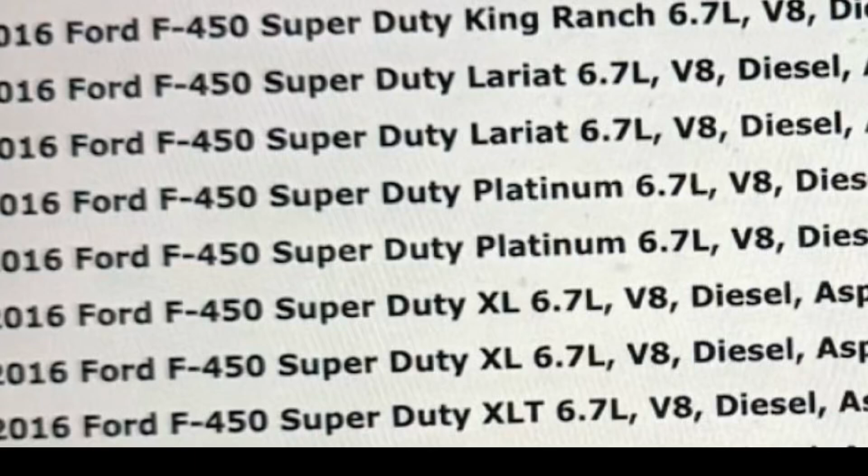What's up, YouTube? Today we're going over the fuel filter replacement on a 6.7 liter Powerstroke.

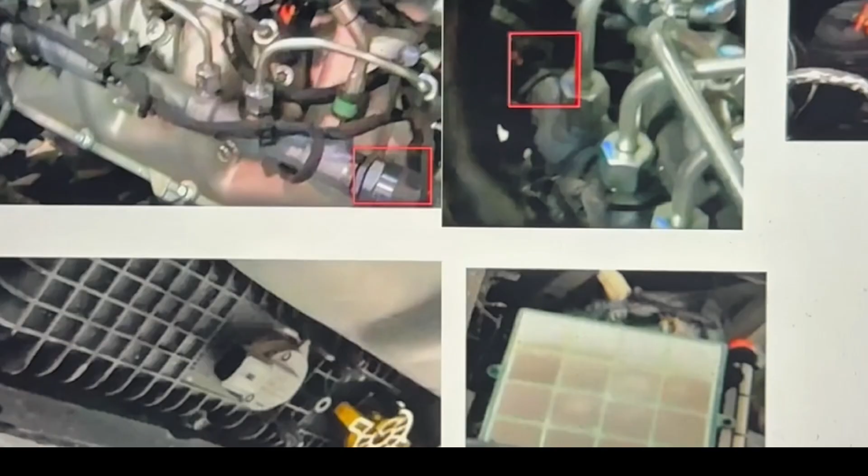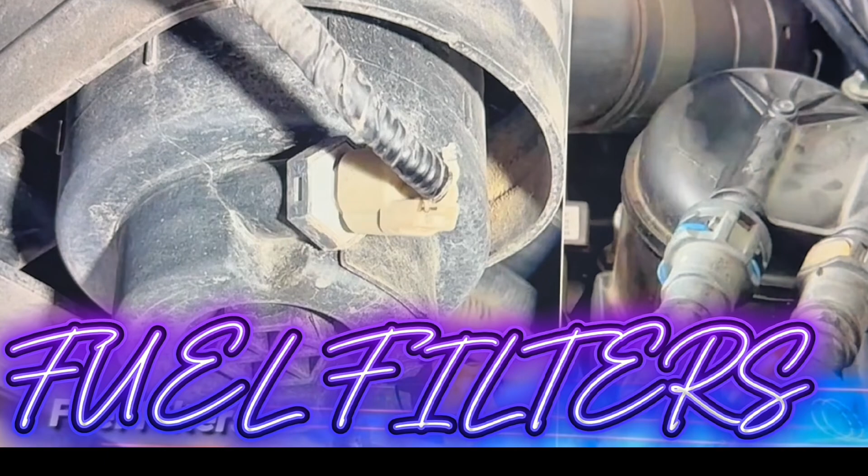Most of all, the critical importance of the fuel filter contamination test. This is highly likely one of the most frequently skipped tests on these vehicles. This is on a Ford F450 with a 6.7 liter Powerstroke engine. We're going to go over how and where to check for contamination and also check over the less accessible components. Okay, so here we go.

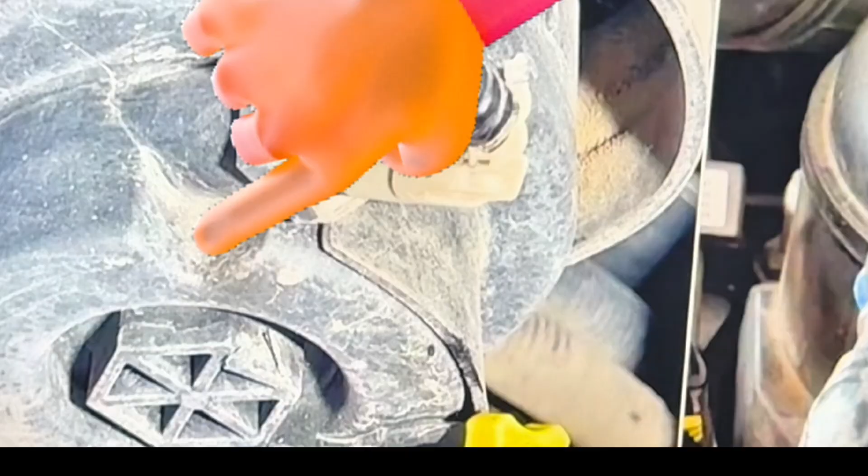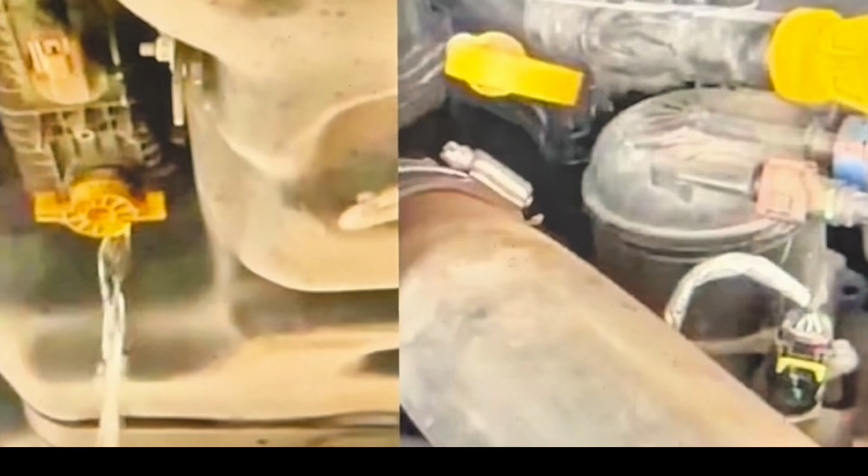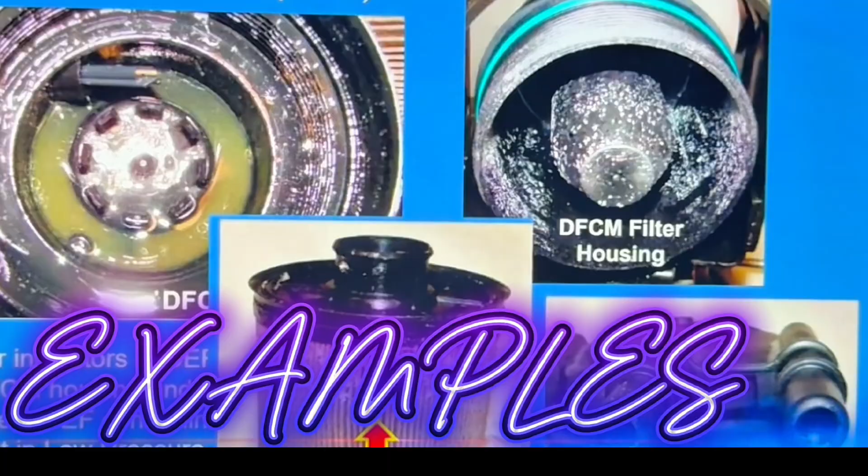If the fuel was not contaminated, proceed to removing the primary filter housing and filter and inspecting further. You will also want to remove the secondary filter and drain into a suitable container for inspection. The later model 6.7 liter diesel has the same filter inspection procedure, however the primary filter is located at the tank and the secondary filter has an extra port at the front of the vehicle.

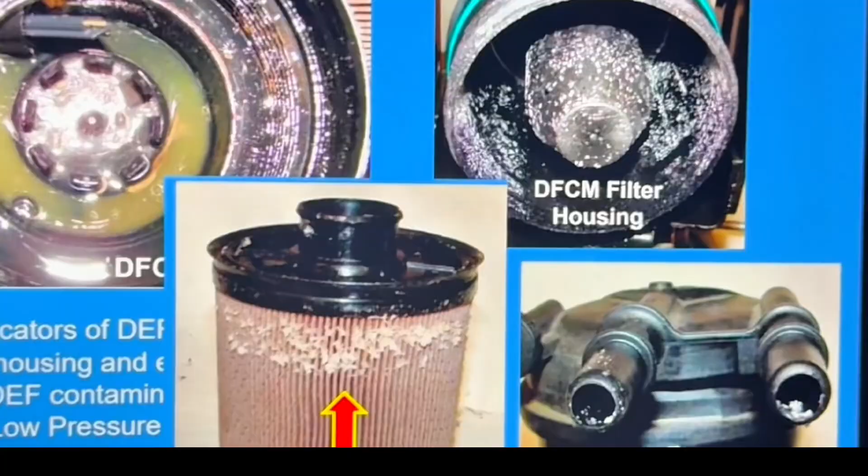There are two common types of contamination you will be looking for. The first example is showing fuel contaminated with diesel exhaust fluid. This happens when customers mistakenly put the fluid in the wrong tank. This is especially problematic because not only does it damage the fuel system, but engine and exhaust system damage can occur as well.

The second example is metal contamination. This generally comes from the injection pump. The contamination can be major amounts of metal or just small particles like what you see here. Regardless of the amount or size, this contamination would indicate the need to replace the entire fuel system.

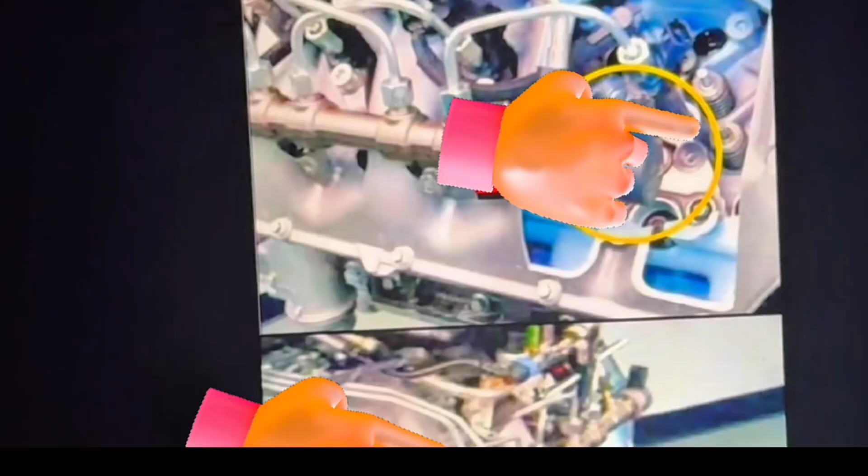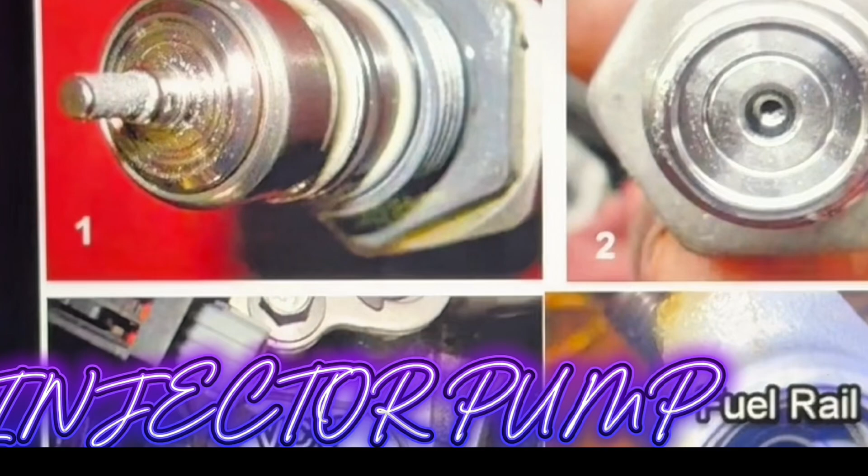Next place we're going to check will be the driver's injector rail. Remove the fuel pressure sensor and the fuel pressure regulator. Inspect them for signs of contamination. It's also a good idea to put a magnet inside the rail to look for small particles of metal. Looking in the rail, there's not a lot of metal, but this is enough to damage new injectors and pumps. Here are some examples to look for on the sensor, the regulator, and the rail.

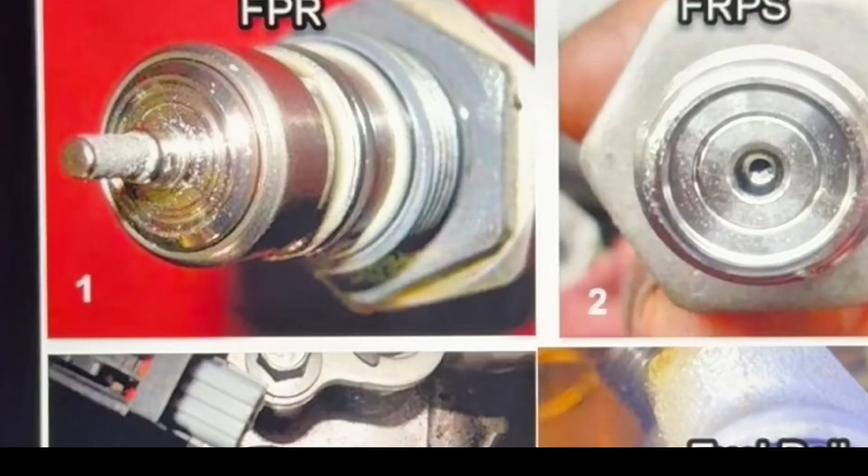This example is the final place to inspect before replacing the injection pump. This is showing the injection pump with the volume control regulator removed. What should be seen down in the hole is clean diesel fuel. Metal fragments will once again indicate the need to replace the fuel system.

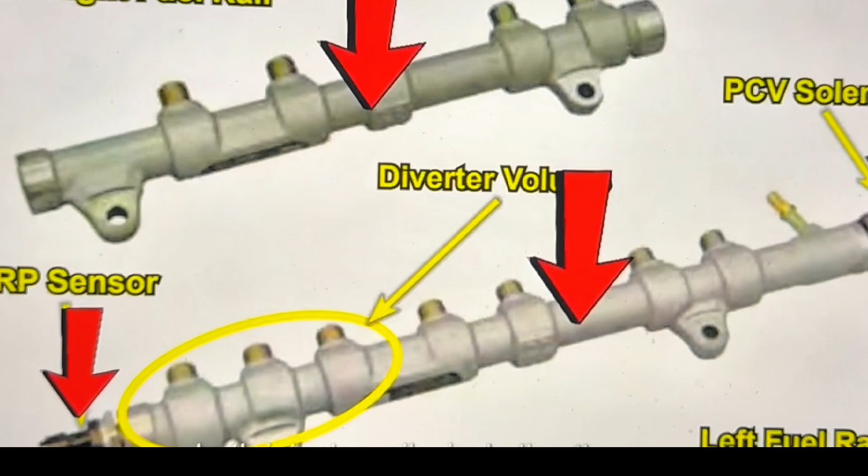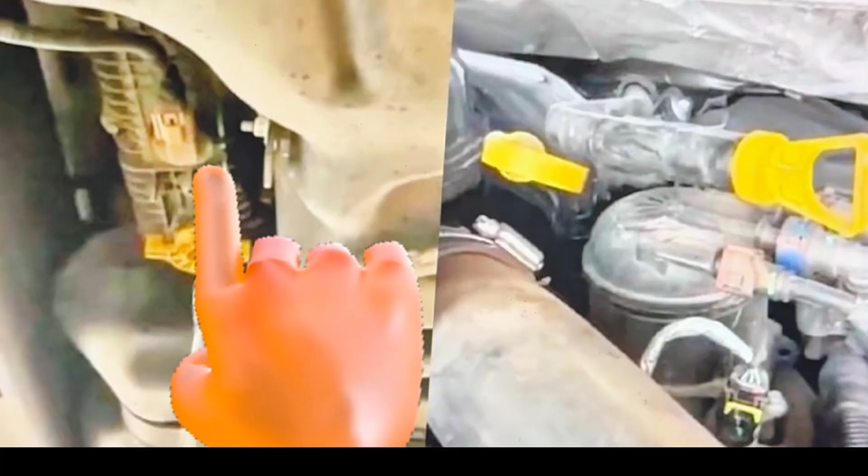If contamination has been found, the following items are critical to replace: both injector rails, including the pressure regulator, fuel pressure sensor, and the steel fuel lines at the rail, the injector pump, and all 8 injectors, both fuel filters and the primary fuel filter. Also, the remaining fuel lines must be completely flushed out thoroughly. It is recommended to replace the fuel tank as well.

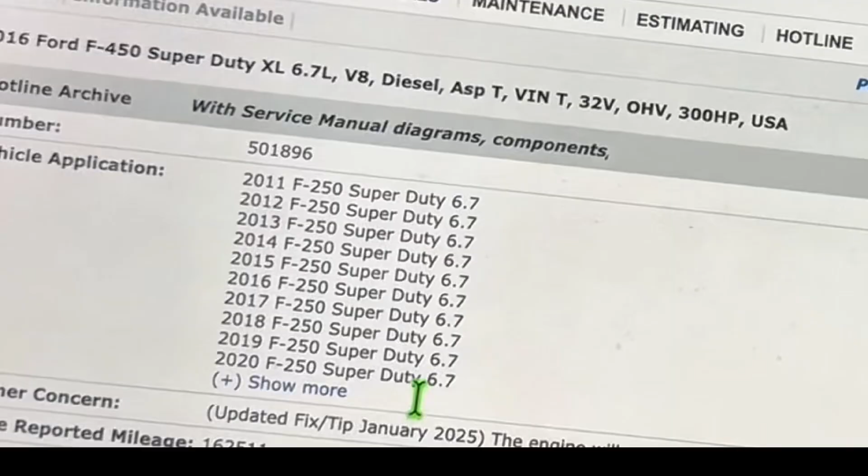Please take note that there are cases out there where techs have performed entire fuel system overhauls and did not replace the fuel tank. Particles from the fuel tank did work their way back in and damage the fuel system. So I just want to reemphasize, changing your fuel filters is very important to properly maintaining the 6.7 liter F450. Very critical. If you don't do it, it could be disastrous down the road, guys. Just stay on top of that.

So right now I'm going to jump right into this video I did with the customer. He called me—he basically had replaced both of his fuel filters and waited too long. So unfortunately for him, he had contaminated his entire system. The truck drove about 50 miles after replacement. He called me thinking he just had air in the lines. Clearly he doesn't have air in the lines.

I'm just going over some of my notes here, running through the laptop. I'm using a software called Direct Hit. I'm basically going to show you guys pretty much everything on here—how many issues are really out there existing with this problem. A significant amount of issues. Fuel filters not getting replaced on time, just over and over and over. You see people not taking care of these systems. Hopefully by the end of this, you guys will have a better understanding of how this works, what to do, what not to do, and what to be on the lookout for.

Most of all, just change your fuel filters.

Next, why replacing the fuel filters is so critical. Diesel fuel filters have the crucial job of removing dirt, rust, and water from the fuel before it reaches the high-pressure fuel pump and injectors. Over time, the filter clogs with contamination. If you don't replace them on schedule, several problems can occur. Engine performance issues: a clogged filter strangles fuel flow, leading to loss of power, poor acceleration, and hard starting. The engine may run rough or even stall because it's not getting enough clean fuel.

Fuel injection system damage: neglecting filter changes can allow debris or water to reach the high pressure fuel pump and injectors, which operate at extreme pressure, 30,000 plus psi. The 6.7 liter Powerstroke injectors and the CP4 fuel pump are very sensitive to fuel quality. If contaminants or water get through, they can score or wear out these precision components or even cause the pump to fail catastrophically. Ford's own service manual warns that failing to replace fuel filters on schedule can lead to fuel injection system damage.

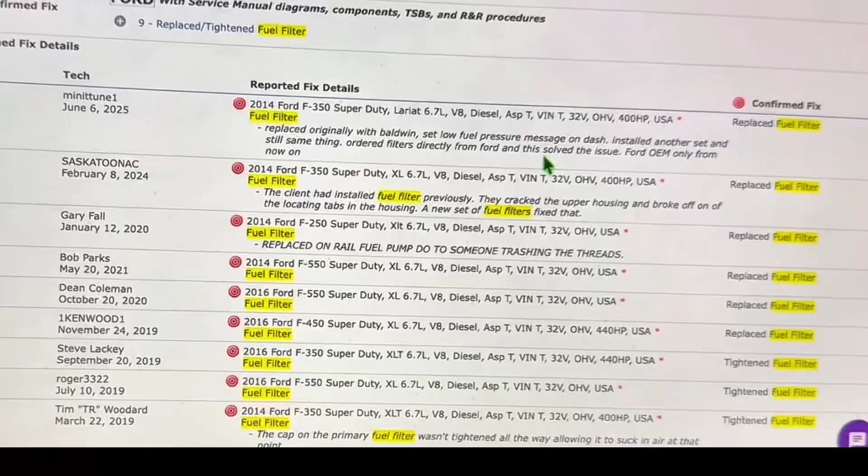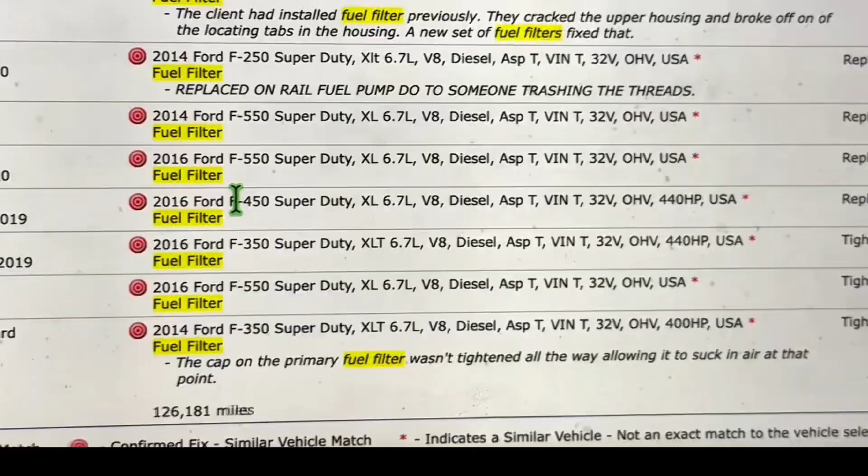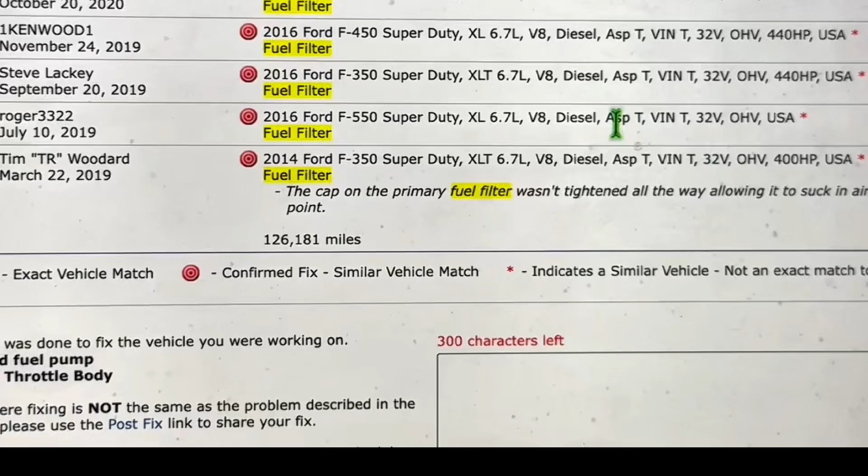Water contamination: diesel fuel often contains some water from condensation or fuel handling. The primary fuel filter housing acts as a water separator to trap this water. If you don't drain and replace the filter, water can accumulate and eventually be drawn into the fuel system. Water is extremely harmful, it causes rust and corrosion inside fuel tanks and fuel injectors, reduces diesel lubrication, and can lead to injector tip failures. Manufacturers specify that no free water should reach the engine fuel system. A regular filter service is the only way to ensure that.

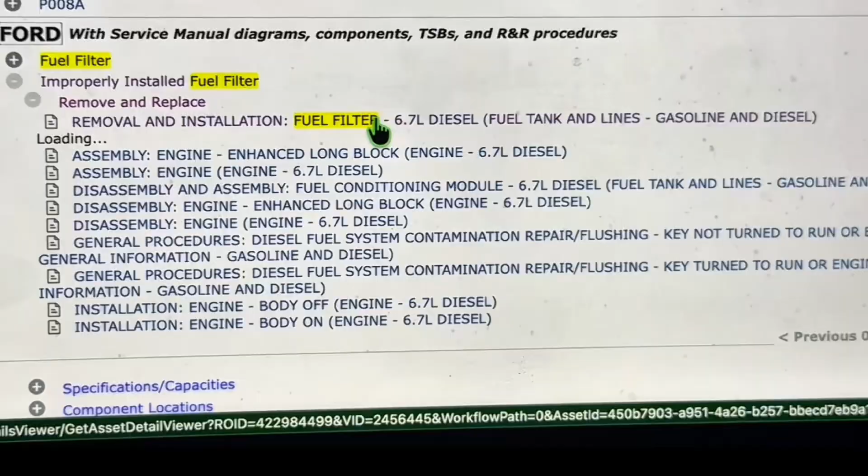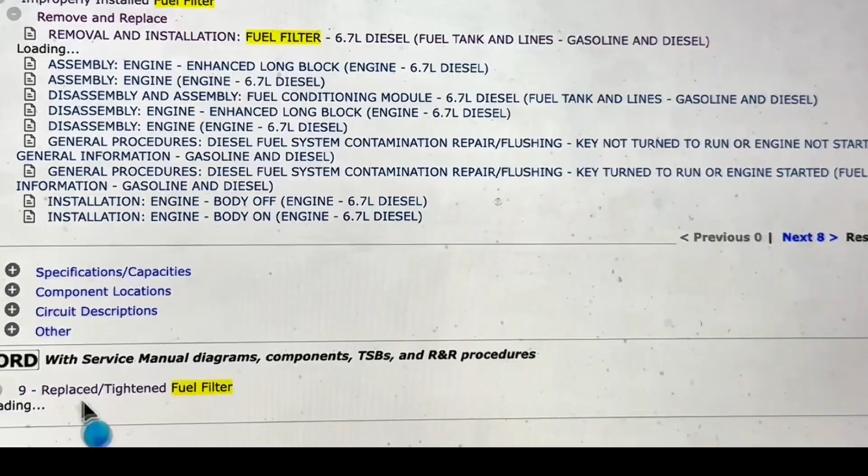Extremely costly repairs: in the worst case, a neglected fuel filter can clog so badly that it starves the fuel pump, causing it to overheat or seize. Or water and grit passing through can make the pump grenade, break apart internally. When the 6.7's CP4 high-pressure pump fails, it often sends metal shavings throughout the entire fuel system, ruining injectors, fuel rails, and lines. This kind of failure is disastrous. Repairing a contaminated fuel system can cost well over $10,000, a five-figure repair bill, to replace all the injectors, pump, and related parts. It's much cheaper and easier to just replace your fuel filters regularly.

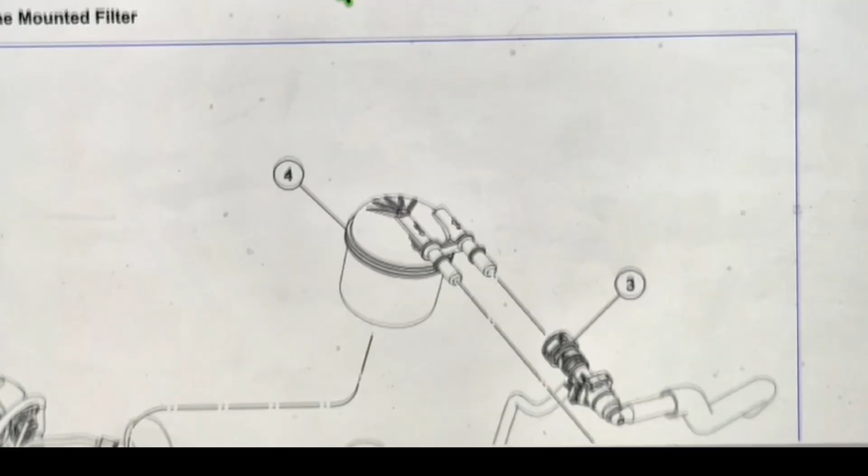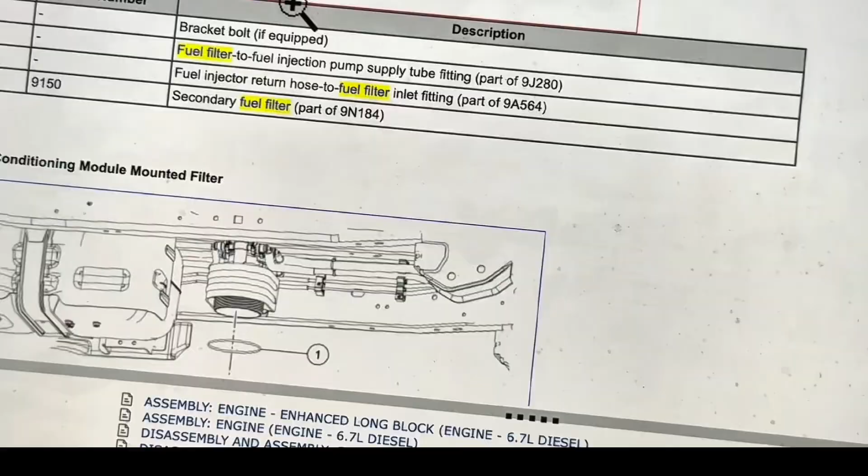Bottom line: replacing the fuel filters on schedule keeps your 6.7 liter Powerstroke running reliably and can save you from breakdowns and huge repair bills. The dual fuel filter system was designed to protect your engine by catching contaminants before they cause damage. Clean fuel is absolutely critical for these modern high-pressure diesel engines.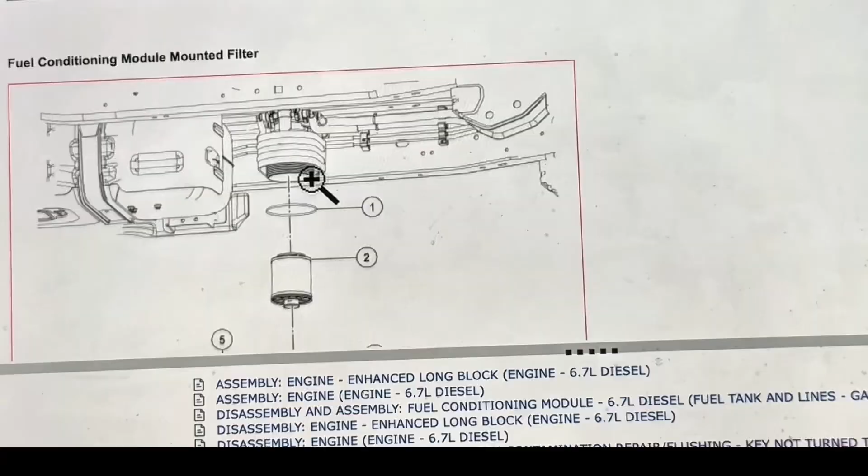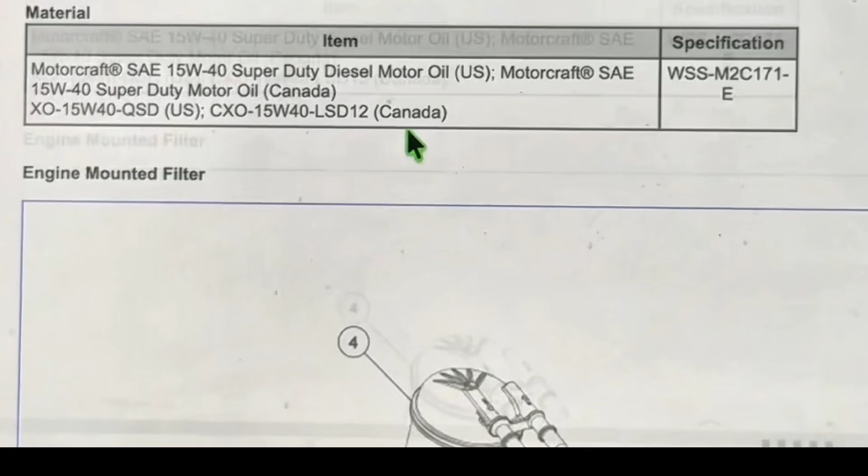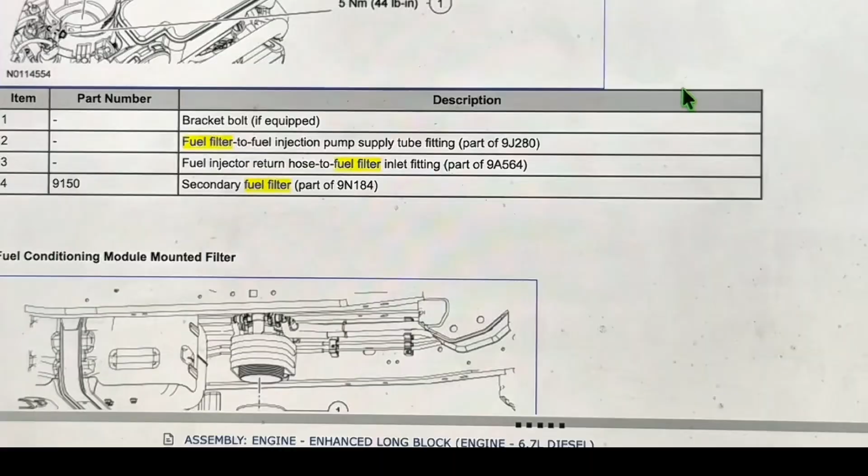Ford generally recommends replacing both fuel filters every 15,000 miles, which for many drivers is roughly once a year under normal conditions. Some sources suggest up to 30,000 miles in light-duty use, but 15,000 miles is a safe interval to ensure protection. Many diesel technicians and experienced owners prefer to do it every 10,000 miles, or at least once every 6 to 12 months, especially if the vehicle's seeing heavy towing, idling, or questionable fuel quality. The improved dual filter system on 2015 plus models still calls for 15,000 mile changes to prevent clogging and injector damage.

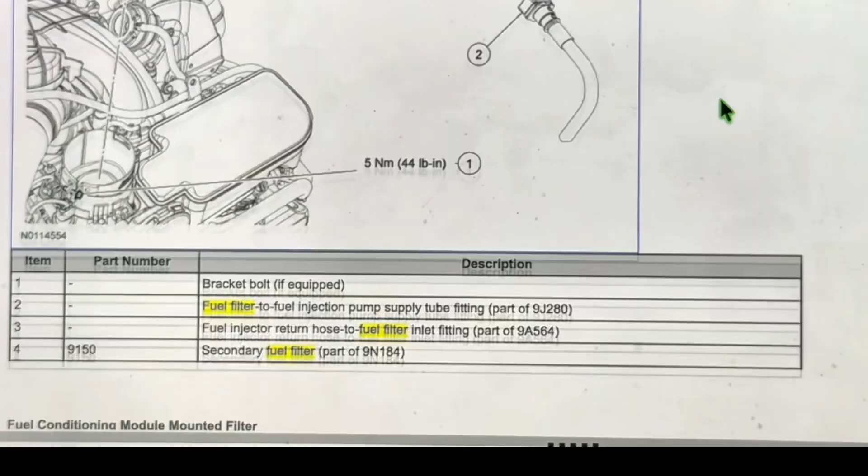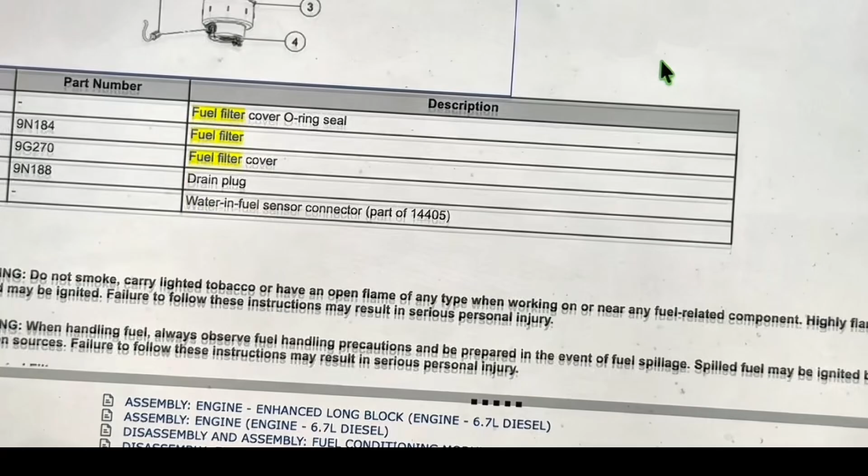Always check your owner's manual for the official schedule and never exceed the recommended interval. If your truck dash displays a change fuel filter message or a water in the fuel warning, you should service the filters right away. Also, use good quality diesel fuel only. Dirty or high sulfur fuel will clog filters faster, so in such cases, even more frequent changes may be necessary.

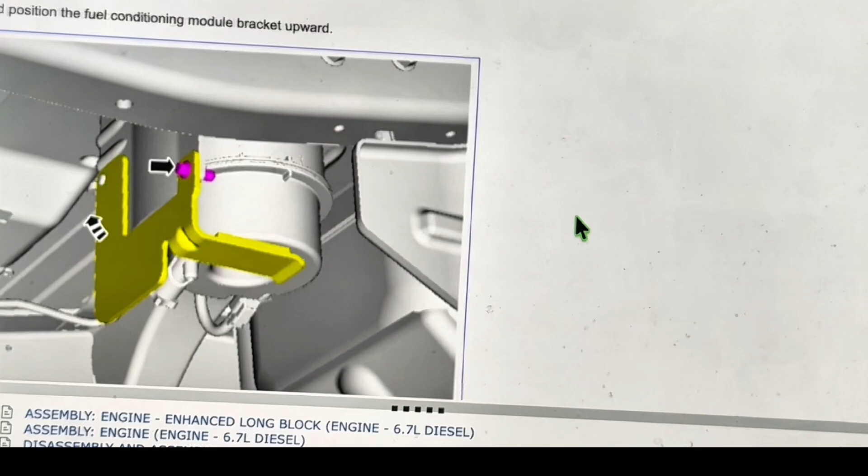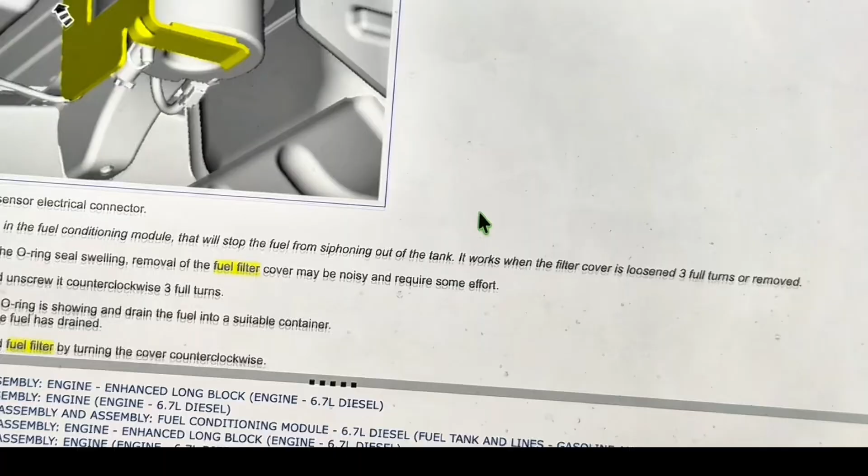So in other words, it's real simple. For example, in this gentleman's case right here, he went well overboard on it. I'm talking about 40,000 miles prior to changing his fuel filters. So what he did is he decided, hey, let me go ahead and try to change my fuel filters now. Well, what happens is when you change it so late, the problem is this: you've already stressed this engine and the components that pump the fuel. So at this point in time, when you change it out, it's like unclogging a clogged... I don't know how to explain it.

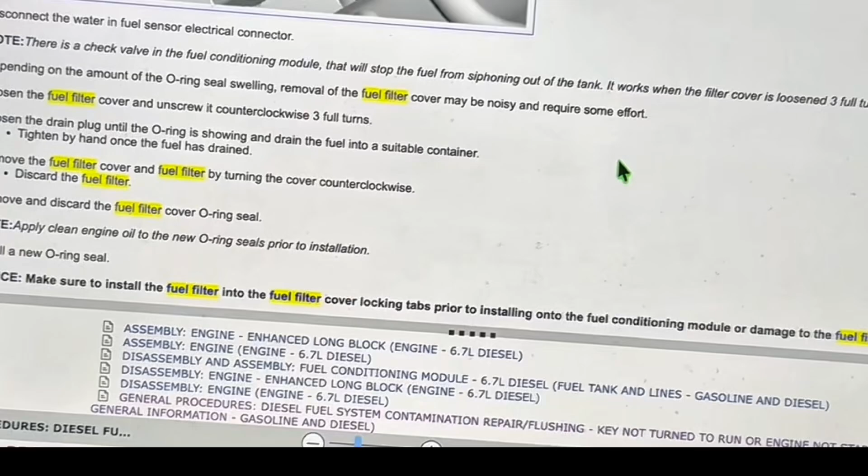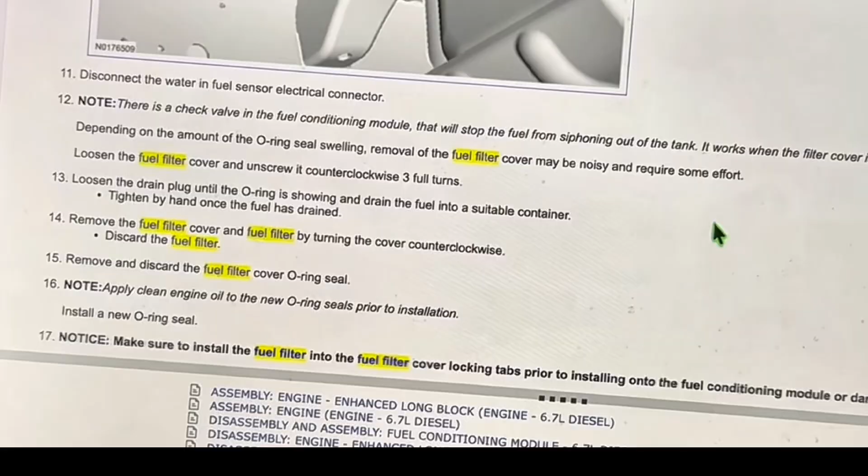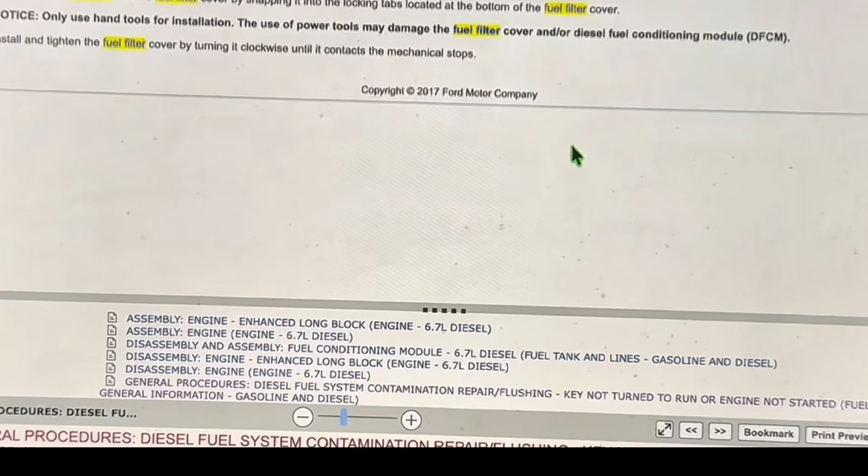This gentleman made it about 40 miles or so after getting gas and changing his filters before his vehicle completely shut off on him. This call actually came out as a late night diagnostic, about 3:30, 4 a.m. I got out there and he's like, 'Oh man, it's just air in the lines.' And I'm like, that doesn't make any sense, sir.

How in the world could you possibly have driven 40 miles with air in your lines? It's just not possible. So, 2 to 3 hours into the discussion with the gentleman, who just did not want to accept the fact that he literally destroyed his engine and had a $10,000 repair, he basically had to bite the bullet because I'm a mobile tech. I can't do this job mobile.

So this can all be solved. Change your fuel filters on time. I've got a little bit more key information right here. I'm going to show you guys on screen.

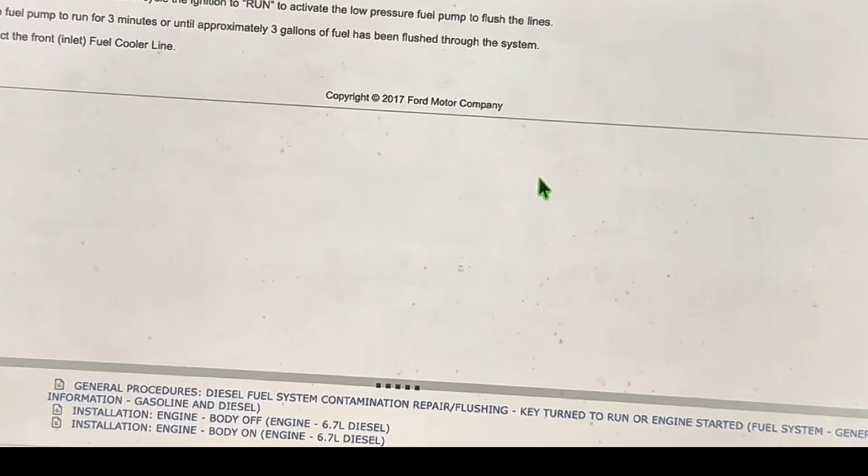It goes to show, when you see so much different stuff out here about damage to fuel systems, people just don't even think about it. They just go out here, don't change the fuel filters, and then they have a $10,000 repair when you could have put on, in 30 minutes, 2 fuel filters that cost you maybe $150. It just doesn't make sense to me.

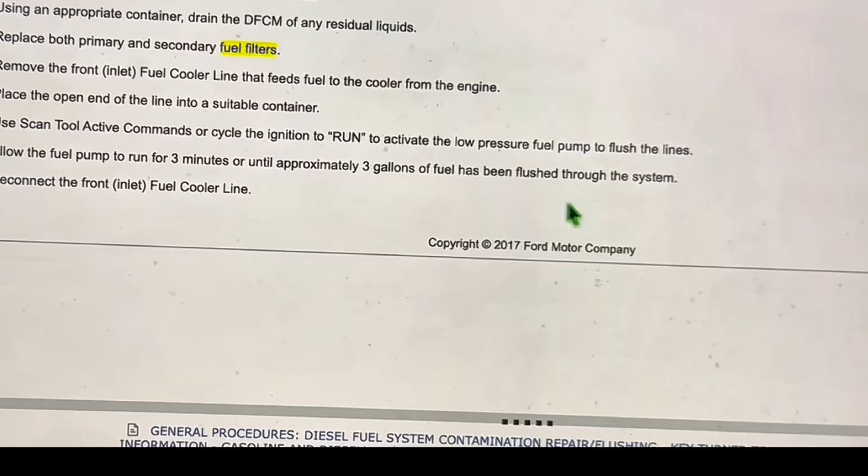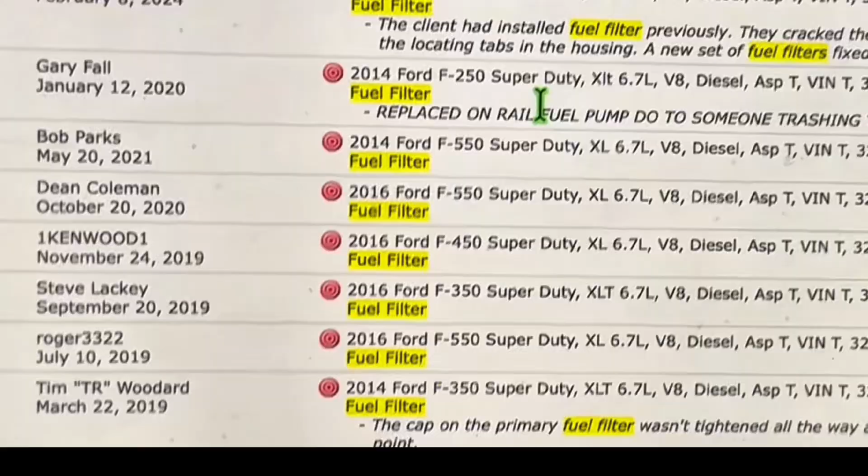Anyway, I'm going to read you a little bit more information that's pretty pertinent to this right here, and then I'm going to go ahead and wrap this video up. So hang tight. All right, so what I will do for you guys, since I was working on a 2014 F450 Super Duty here, 6.7 liter, I'll go over the basic steps on how to start the fuel filter procedure.

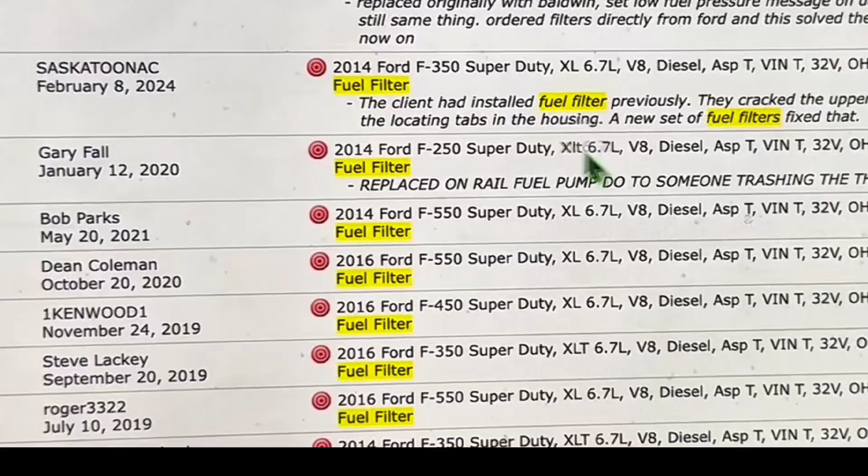On this 6.7 liter Powerstroke, there are 2 fuel filters: a primary fuel filter and a water separator. The filter is mounted on the frame rail inside a unit called the diesel fuel conditioning module near the fuel tank. A secondary fuel filter is mounted on the engine, driver's side of the engine bay.

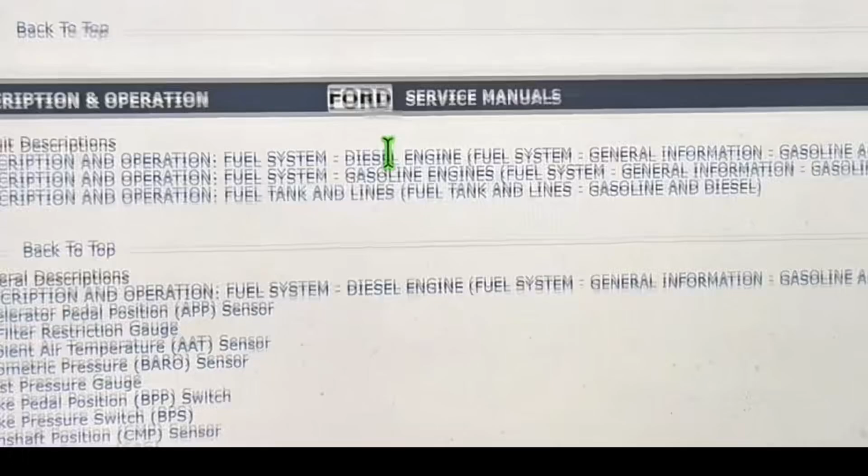You want to replace both of these. Make sure you do both, don't just skip one. It's generally best to start with the primary, which is frame mounted, the filter beneath the truck. Then do the secondary engine filter under the hood.

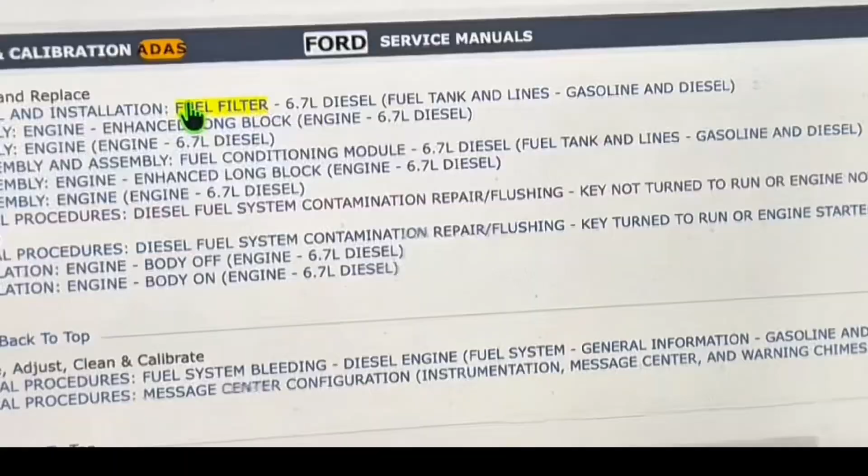The reason for this order is gravity, of course. It's going to help the fuel get back up and reach the engine faster when you're priming it once you do the change, trying to get the air out of the system. So you shouldn't have a lot of trouble purging the air if you follow the procedure and do the fuel filters in order.

All right, so basically I'm just going to let this video wrap itself up. Hope you get a good chance to check out the notes. And like I said, definitely urge you guys, if you're a mobile mechanic or you need great information, Direct Hit's wonderful.